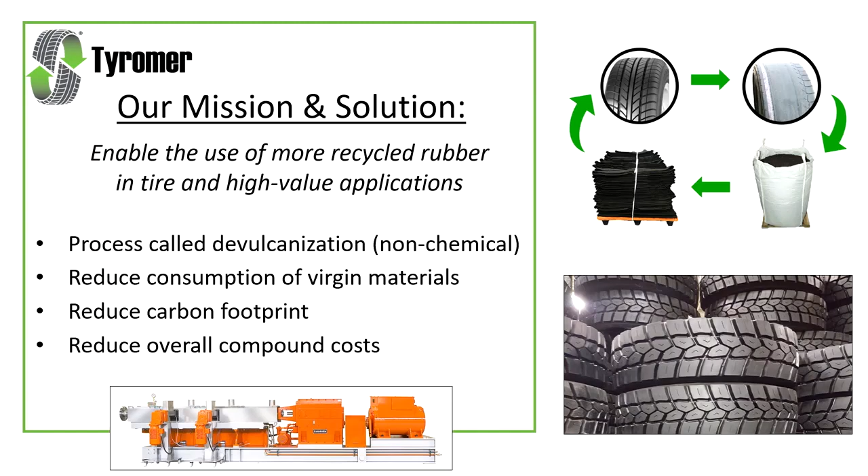Through this process of devulcanization, we can reduce the consumption of virgin materials, we can reduce carbon footprints, and we can really help reduce overall compound costs, which is very important. No one is going to pay extra for sustainability right now.

We've got our pilot facility that has been operating for about 6 years now, and we've actually just opened our new facilities in Windsor, Ontario, and in Arnhem in the Netherlands.

A really important thing to understand about us is, as a small company, we have to have a strategy of open innovation and collaboration. We've seen so many times that working together is really what drives the progress and the urgency. This is always our strategy. We want to learn about the industry and make sure that we can fit in, not necessarily be absolutely disruptive.

Our Tyromer technology inventor is Professor Costas Tzoganakis from the University of Waterloo. He is still our CTO, he still leads our R&D team, and he's still part of our operations today. The product that we produce is devulcanized rubber. It's called tire-derived polymer, or TDP.

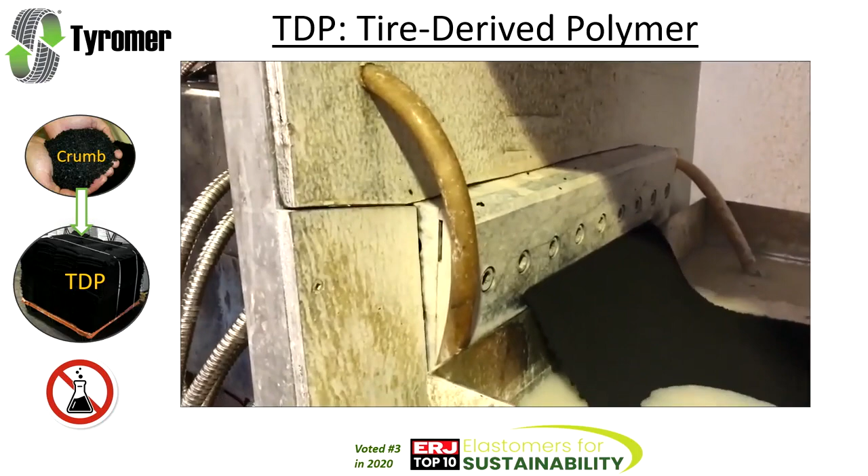Now, this is a very simple video, one I've been using for quite some time now. You can see crumb rubber dropping into the extruder, in the size of about 20 mesh. Through a process of heat, shear, and pressure, we do the devulcanization, and that's the devulcanized product that comes out. That is the entire manufacturing process.

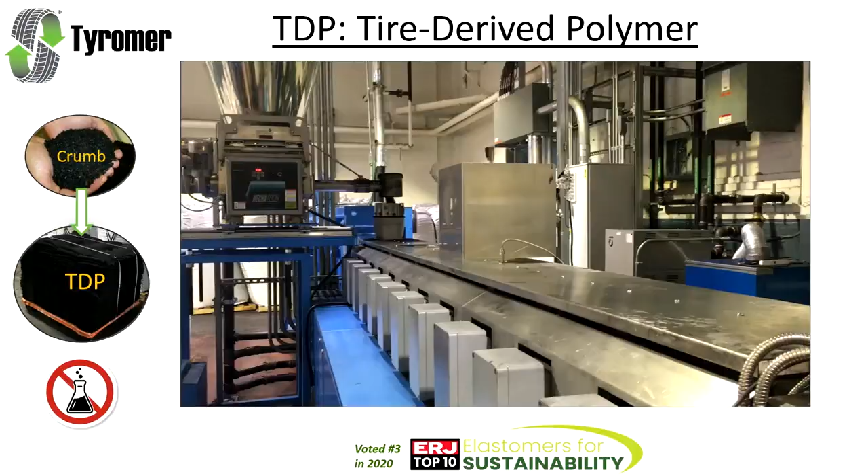It is very simple. I like that video because of the simplicity of it. Basically, the crumb rubber goes in, and 100% of the crumb rubber comes out as devulcanized material. There's a little bit of loss at startup and shutdown, but the process is meant to run continuously, so there's very little waste once you go.

So a little bit more about the product. We really consider it a combination of low cost and high performance. The TDP can be made from a large variety of feedstocks, so truck tires, passenger tires, mining tires, large tires. It can also be made from various scrap rubbers, not necessarily just tires, although tires has been our main focus. Factory scrap, non-tire rubbers like EPDM can also be devulcanized.

Something important to understand about the technology: it does not change the chemical composition of the material. So if you're putting a passenger tire into the extruder, the same chemical composition is going to come out. The only difference is that the sulfur bonds have been preferentially broken.

Same thing with the truck tire. If you put a truck tire in, it has about 40% natural rubber, maybe 22% synthetic rubber or so, and carbon black. The same ratio of chemical composition comes out the other side.

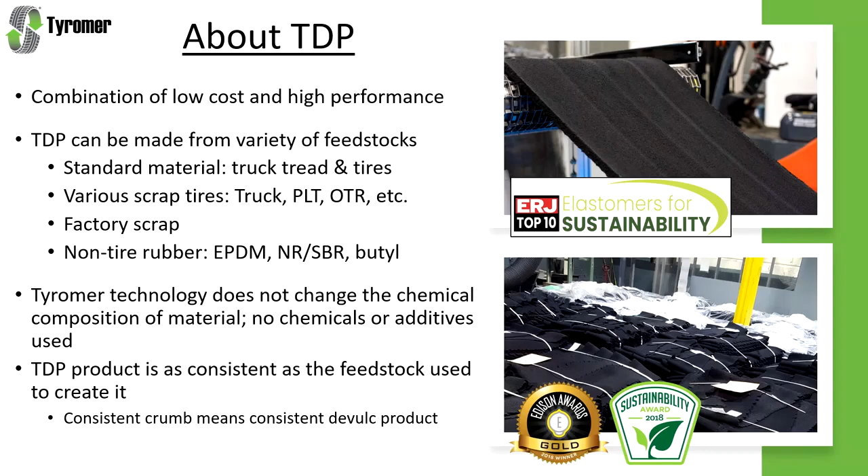Not just with our technology, but with a lot of recycling technologies, a big concern from the tire manufacturers, and a big reason it's been hard to get the material used in the past, has been the consistency. So consistency is of utmost importance to us and other recycling processes.

So in order to show this consistency, we have to look at our feedstock. If we put the same exact feedstock into the extruder, the same devulcanized product will come out all day, every day. But as soon as you start having variation in the feedstock, it can create some variation in the product. So for us, we really have to focus on the recycling portion, the sorting and grinding of tires, and making sure the feedstock is consistent throughout our process.

One way I like to talk about the consistency of the product and the variation, because inevitably there is a little bit of variation in the product, is to compare it to a natural rubber crop. So if you have a natural rubber crop, say RSS3, that comes from West Africa, and another crop that comes from Southeast Asia, maybe they had a dry season, maybe they had a rainy season, there will be a little bit of variation in that material as well.

But again, the tire manufacturers specify this material, they approve it, and the end product is basically the same. That's the way I like to think about our product - the variation is really minor. There's going to be a little bit of variation, but if you're mixing the product in at 20%, it doesn't really have a big effect on the final properties.

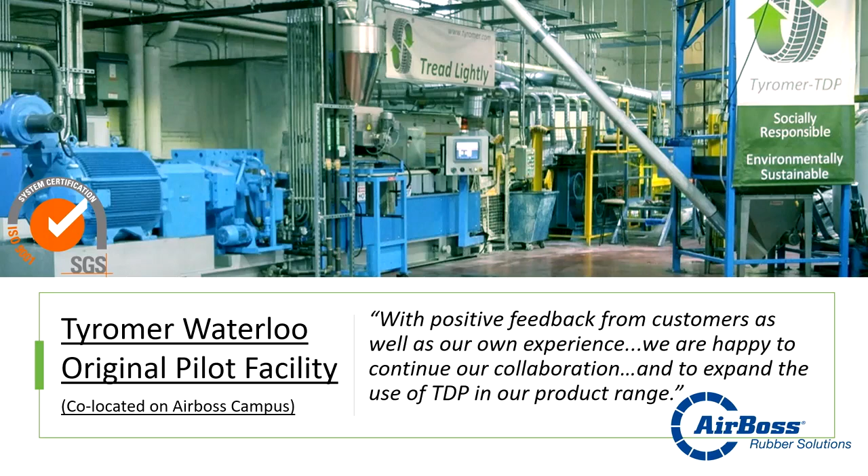In fact, just last year, we passed a pretty significant milestone. We've retreaded over 10,000 of these large tires with 20% of our recycled material.

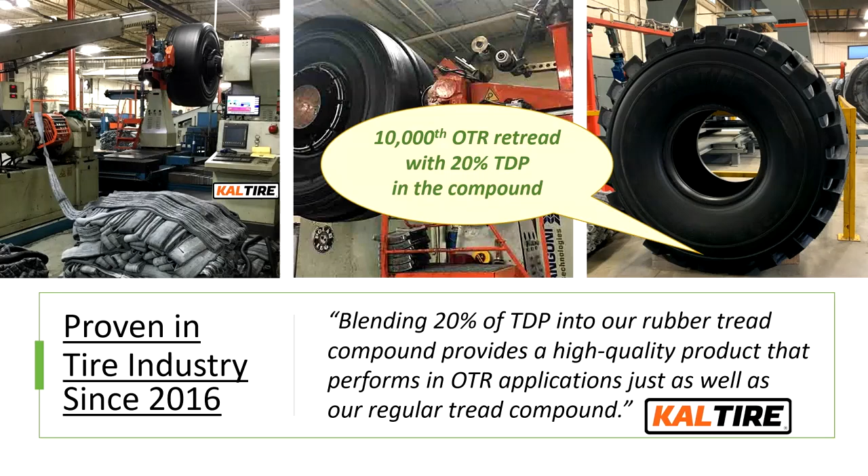Now, Kal Tire, who I think are present at this conference in some way - I don't think they have a booth, but they are one of our largest customers and one of our biggest partners here. Kal Tire does a lot of retreading on mining services and truck tires as well. We continue to have a great relationship with them, and hopefully this is really just the start of what's possible.

Now, a lot of manufacturers, and Ewan was pointing at this earlier, are talking about sustainability and being more sustainable, using more recycled product. But what does that really mean, and what are the tire manufacturers saying? Again, as Ewan was mentioning, I think there's just a little bit of discrepancy between what people are saying and what people are acting on.

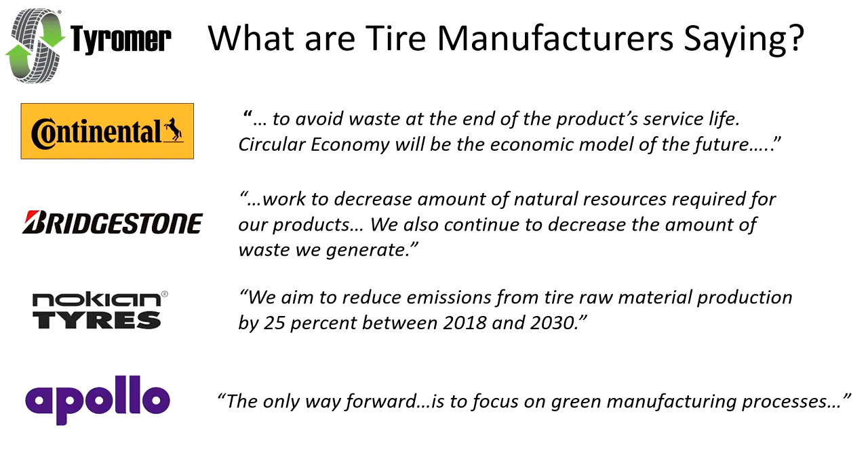But you can see whether it's Continental, Bridgestone, some of the largest in the world, or even Nokian and Apollo, which are a little bit smaller manufacturers, they still basically all have the same kind of message - these quotes came straight from their sustainability reports. Continental says: to avoid waste at the end of the product's service life, the circular economy will be the economic model of the future.

That is really what Tyromer is trying to do. We're promoting tire-to-tire recycling. We want an old tire to in some way be able to be used in a new tire. Now, Bridgestone says they want to work to decrease the amount of natural resources required for products.

Well, great - we have 1.5 billion waste tires that come every single year. Let's use those. We can really see that companies are aiming to reduce their emissions and really looking lately to secure raw materials. That's a really big thing that's become even more important this year.

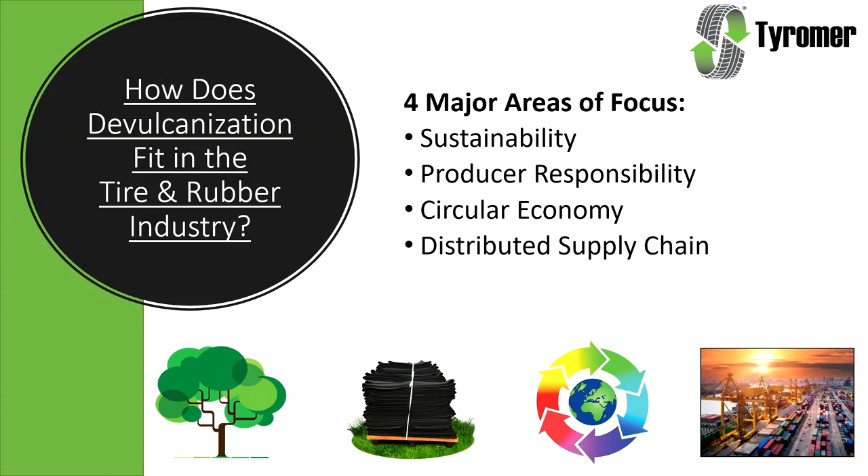I want to talk about how devulcanization fits into the tire and rubber industry on a larger scale. This also applies to recycled material generally, like Pyrum. So how does recycled material fit into the tire and rubber industry? There are four major areas: sustainability, producer responsibility, circular economy, and distributed supply chain.

In sustainability, Tyromer considers devulcanization the best practice because we can return old tire rubber into new tires. We feel that's the simplest link of tire-to-tire recycling. It's really a renewable resource, something that's going to come each and every year, whether you're in Germany, the Netherlands, Canada, or Asia. The devulcanization process doesn't change the composition of the material, so it still has synthetic rubber, natural rubber, carbon black, etc.

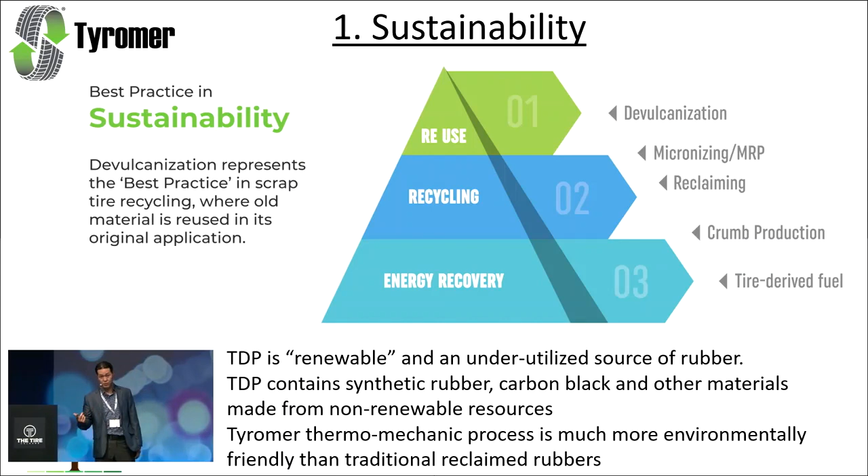Producer responsibility is becoming really important, mostly because of legislation. Governments are starting to require it. Places like Chile and parts of the United States have already mandated extended producer responsibility, whereby tire manufacturers have to help deal with the products at end of life. That's a challenge for manufacturers today—they can't just think about manufacturing and sale, they have to think about how to use the material afterwards.

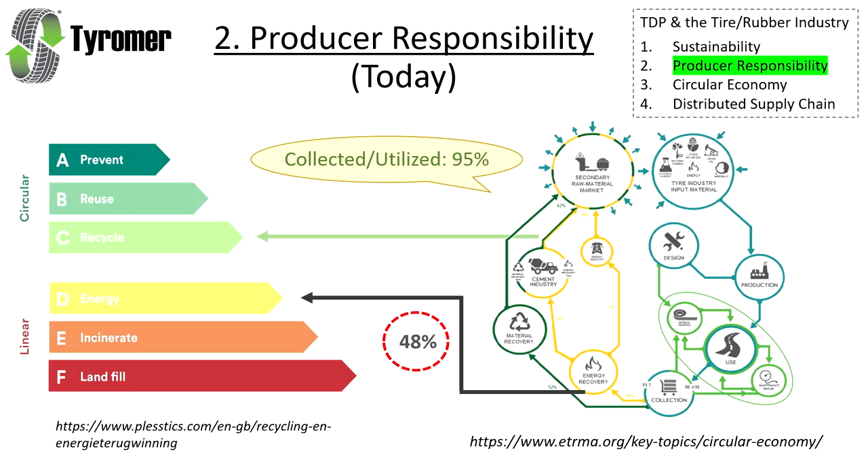In terms of recycling, the EU actually does a really good job—they collect and utilize 95% of scrap tires. However, almost half of that is still going to energy recovery, basically cement kilns and burning. We think there's definitely better uses for that material. Right now some of it is being recycled into crumb rubber, micronized powder, and reclaimed rubber, but there's still a lot of opportunity in the reuse stage.

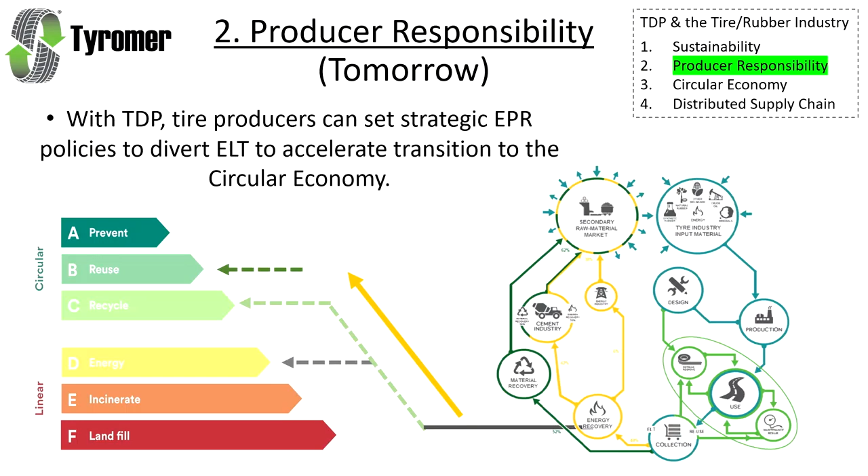This is what EPR looks like today, but this is what we see it transforming into tomorrow—getting away from energy recovery and burning. There are much better applications, whether devulcanization, pyrolysis, or micronizing, than simply burning it for fuel value. So we'll see more recycling and more reuse. I think we'll see legislative action soon too—mandates to use recycled material in tires are coming.

Right now there's a circular economy developing in tires and tire recycling, but we're just starting to fill that gap. Historically we've had a take, make, use, and dispose model—a linear economy. Now with recycling technologies developing, we can add this recycling loop, taking less, using less, and disposing less. In a circular economy model, we're taking less from the environment.

The supply chain has had all sorts of disruptions the last couple years, and shipping has become incredibly expensive. How does recycled material fit into this distributed supply chain? We think the best practice is to buy local. Our licensed facilities want to be close to manufacturers—if one needs a facility in India, we want that facility close by. We just started our new facility in Arnhem, Netherlands for the European market, and we have two facilities in Canada for the North American market. We're looking to reduce shipping distance, not just for CO2, but for material security.

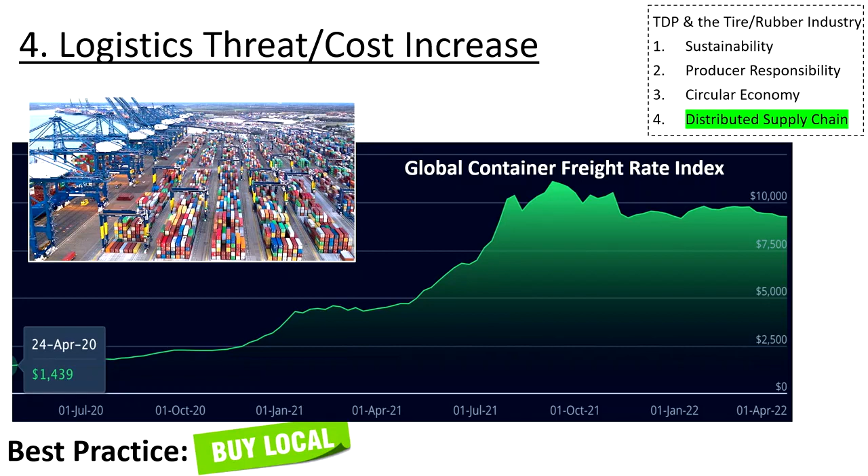This is something I don't mean to instigate pain with anyone, but a couple of years ago, it was maybe $2,000 to ship a container, and we might be looking at $10,000 or $14,000 to ship that very same container today. So in terms of manufacturers, a lot of prices have been increasing. This is a giant portion of it. So again, we really see that we have to focus on our best practice, which is to buy local.

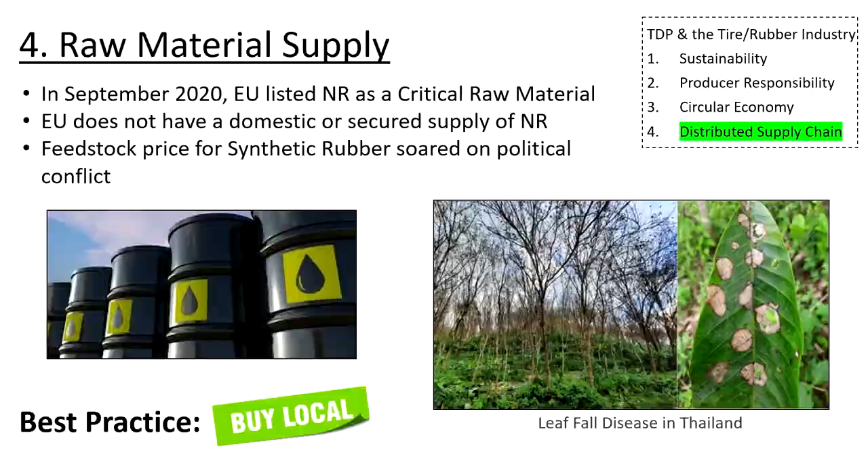And then, of course, with the war, there's also been quite a big problem with materials coming from Russia, whether that's synthetic rubber or carbon black. Back in September 2020, the EU actually listed natural rubber as a critical raw material. And we've seen that since about September of last year, natural rubber prices have increased about 40%. So in less than a year, the price has increased over 40%, and it's really put a strain on a lot of manufacturers today.

So what is the future of tire recycling going to look like? Whether this is 20 years in the future or 10 years, I'm not really sure. I'm really talking about what is going to happen in the immediate future. What is happening right now, and what is going to happen in the next few years? What is everybody in the industry going to notice happening in the next couple of years?

So obviously, we've got to focus on material reuse. That's very important, and we've got technologies now that are able to do this on a large scale. We're going to see a more organized recycling chain, where it's important that tires are sorted and cleaned before they're shredded. There's going to be different recyclers working together, as there's different steps in the process.

We're going to see an increased urgency and collaboration. We've heard talk about that, but now we're actually starting to see a lot of the manufacturers dip their toes in it and take this more seriously, putting real projects behind it. And then for us, a focus on quality systems.

Again, in order for us to be used as a raw material in the tire industry, they use an incredibly large amount of material, so we have to make sure we're providing a consistent product so their products can stay consistent as well. In terms of material reuse, traditional recycled materials like crumb and reclaim rubbers are often used as fillers. The difference with devulcanized material is that it really is a functional material. It can actually improve certain properties when you add it.

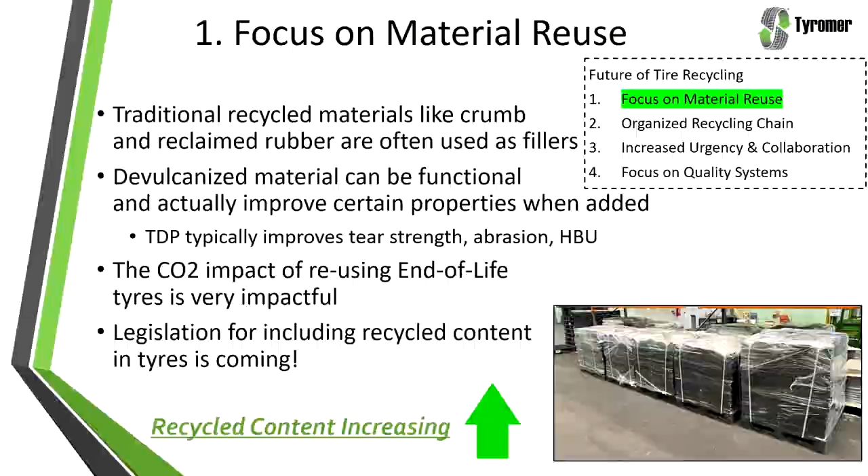Now, something I said earlier: I think the legislation for including recycled rubber in tires is coming to the EU relatively soon.

There's an example I like to give about the United States. Back in 2007 or 2005, something like that, it was the state of Minnesota. A single state in the United States decided to mandate ethanol in the fuel, mandating 5% ethanol in all the fuel.

Now, all the car manufacturers in Detroit, GM and Ford, they all said it can't be done, it's going to ruin our cars, it can't catch on. And today, 10% ethanol is mandated in the entire United States, with a lot of states moving to 15%. So legislation takes one state to turn, but we really see that this is the movement, this is the way that things are going to be going for the future.

Now I talk about a more organized recycling chain, and this is really important, at least for us at Tyromer. The impact of sorting and separating tires is very clear. Our technology might not be the best solution for every type of tire, but we're a great solution for truck tires, OTR tires, mining tires - the larger, the better, in some sense. In order to create a consistent product, we have to have consistent feedstock.

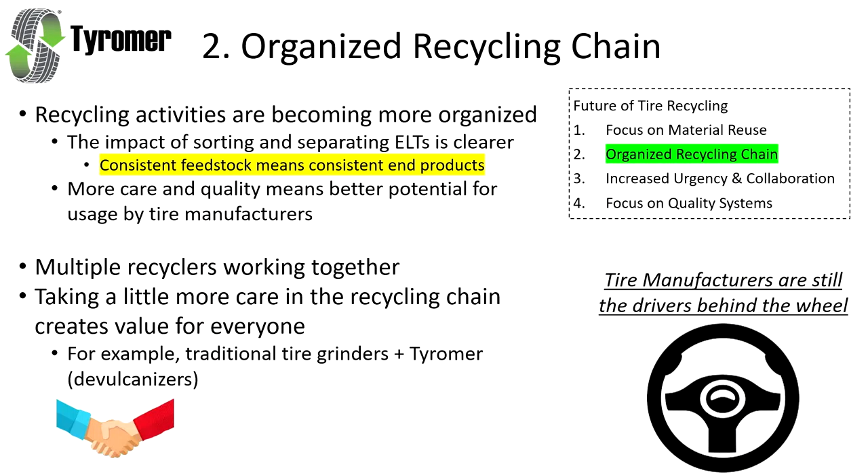We don't want a product with a lot of dirt, fiber and metal in it, because we can't pass that on to a tire manufacturer - they won't accept it. So we really want control of the feedstock, which we do through sorting and organizing. More care and quality on our side means better potential usage for the tire manufacturers. That's been the huge thing with them - they want a consistent product on a large scale, and we're finally at the point where we can provide that.

Now we're going to see more recyclers working together. Of course, we hope to one day bring the whole process in-house, like Pyromex, who actually do the shredding themselves in their own facility. That's great. Right now we work with other recyclers to provide the solution for us, so we work very carefully with retreaders, recyclers, and tire grinders to make sure we have feedstock suitable for our products.

But at the end of the day, it's still tire manufacturers who are the drivers behind the wheel. So we definitely challenge them not just to test, but to really act on this, because we know the material can be used and has a lot of good uses.

Now we do think we'll see increased urgency and collaboration - we're already starting to see it. In fact, I was at this conference four years ago, and we had just started the recycling hall, and there was just some talk about sustainability. But now, if you walk around, a lot of these companies - that's maybe one of the main messages they're saying. They're talking about sustainability, environmental friendliness, and finding ways to reduce their carbon footprints.

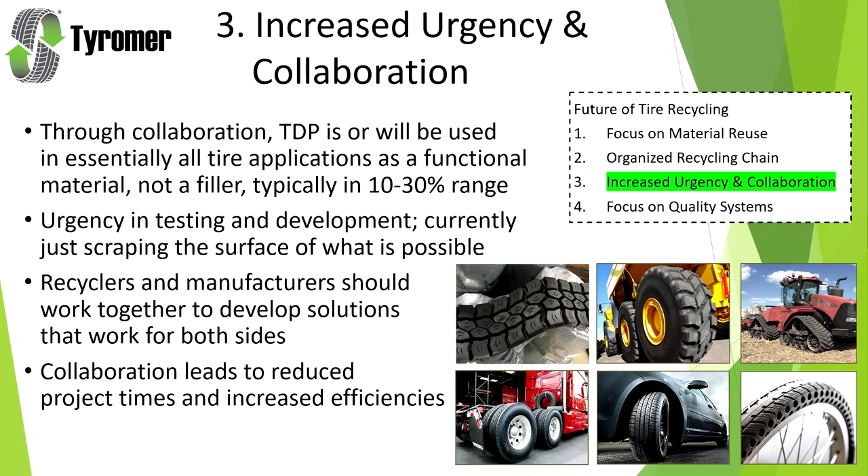For example, if you're making a shoe sole out of our devulcanized rubber, you can probably use 80% or even 100% in some cases. So it really just depends on the product quality you need, and the safety requirement, I think, is a big one.

Now, for us, collaboration has always led to reduced project times and increased efficiencies. If we don't collaborate and don't have great communication, getting a new material into the tire industry might take three or four years. If we work closely together and use our resources wisely and efficiently, maybe we can take that down to one year or a year and a half. So that's really what the collaboration is trying to do - it helps us with that.

And lastly, a focus on quality systems. I've been touching on this quite a bit already, but it really is of the utmost importance. This is the biggest reason tire manufacturers have to say no - it's not consistent, it's not quality. But we've shown that we can do that. We have a very robust quality management system, with ISO certifications in all our facilities. We really do have strong control.

Just like any other manufacturer, when a tire manufacturer gets a new product - whether natural rubber or devulcanized rubber - there's a specification that product needs to meet. If it doesn't meet the specification, the tire manufacturer rejects it. We are the exact same way: the ground tires are our feedstock, our raw material, so we set specifications with our partners and suppliers - if the material doesn't meet our specifications when we receive it, we just won't use it. It's that simple, and that's how we control the quality and consistency of our product.

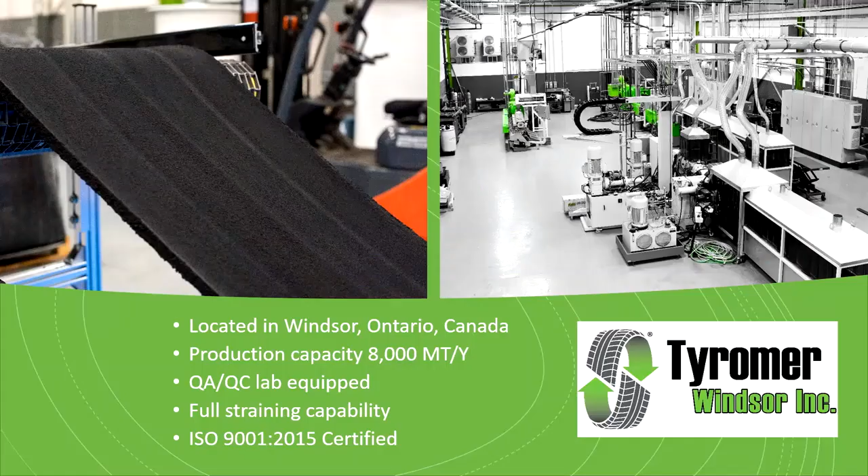We just had two facilities open late last year. One is in Windsor, Ontario, Canada. It's a larger facility with a production capacity of about 8,000 metric tons per year. We have a full lab there.

We have what's called straining, which is becoming very important in the recycled rubber industry. Straining is basically pushing hot rubber through a very fine mesh screen, so you're removing any contamination out of it. It's basically an extra safety step.

What we do is devulcanize the rubber, crumb rubber goes into the extruder and comes out, and then we actually force this hot rubber through a fine mesh screen to remove any potential contamination. That's just a quality check, and something that gives the tire manufacturers and rubber manufacturers a lot of confidence in the material.

Now this is our new facility in Arnhem, the Netherlands. I'll show a little more about this facility because it's a little more relevant to the European market, of course, and it again has just opened late last year. It's located in Arnhem, in the Netherlands. We took the train there just the other day.

We really consider this like our production facility 2.0. It has a little bit smaller production capacity than Windsor because it's meant to be a showcase for the European market. So there's a little less production capacity, but that is starting to build.

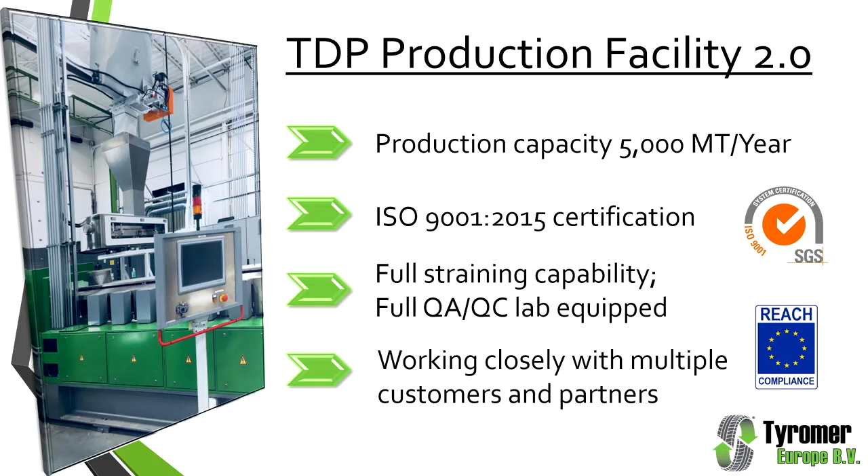Again, we have our full ISO certification already. We've passed the quality steps for a couple of large manufacturers. We do have full straining, and again, a full lab as well.

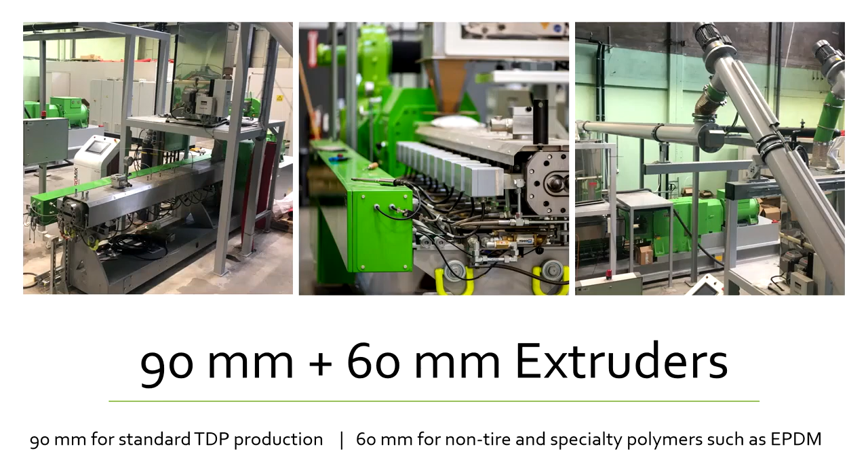In this facility, we have two extruders. We have a 90mm extruder for standard TDP production, and a 60mm extruder, which is a little better for synthetics and non-tire rubbers like EPDM.

This is the straining here. Again, the hot rubber is getting forced through this mesh screen, and it removes any potential contamination. It's much better for us to filter out the material first, so we work with the suppliers and feedstock suppliers to make sure there's not a lot of dirt and metal contamination in this to start.

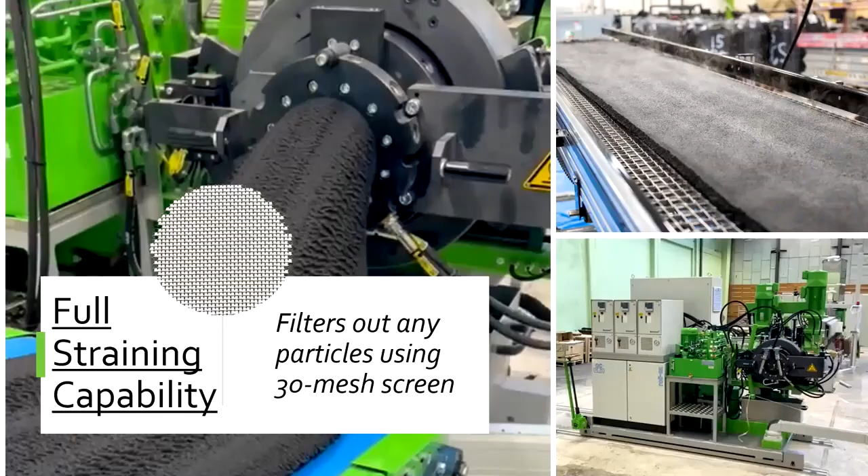But this is kind of like one of our last defenses. So as soon as we produce the product, it's still hot, it goes through this fine mesh screen, and then it goes downstream to packaging.

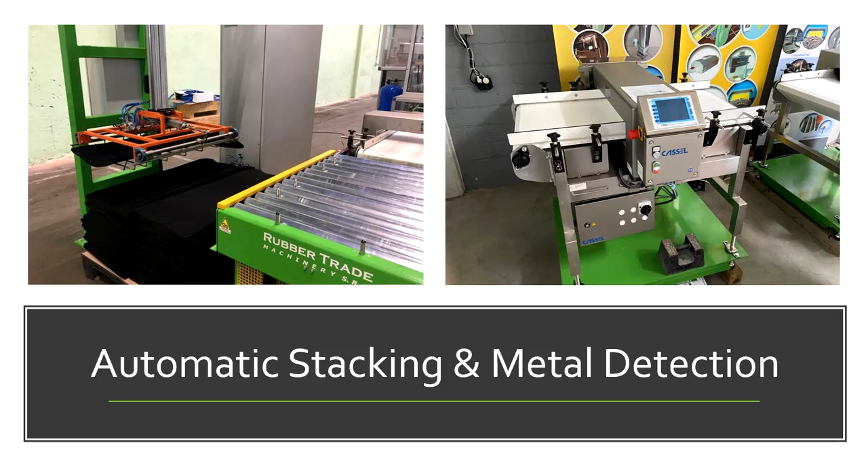Now we have a little automatic stacking and metal detection. The metal detection is the very final safety step that we have. As soon as the material is produced, it gets forced through the fine mesh screen and straining, and then it runs through a final metal detector before being stacked.

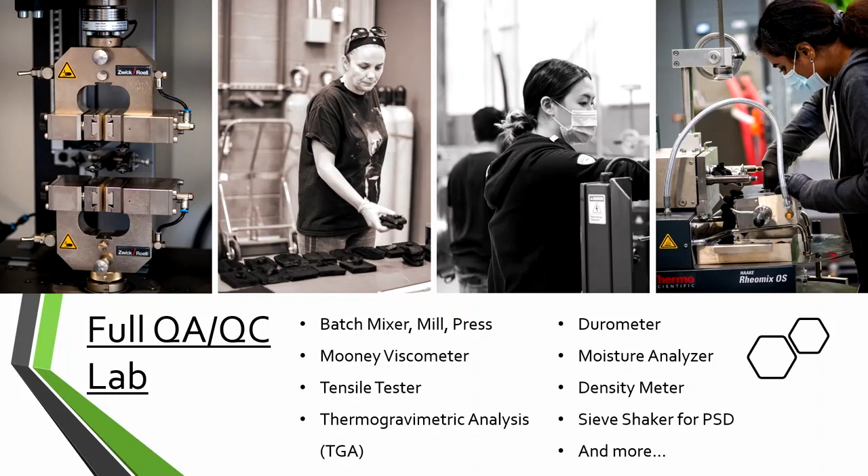Now we have a full QA and QC lab there. Everything that we produce comes with a certificate of analysis. Again, we work very closely with the tire manufacturers to set a specification together.